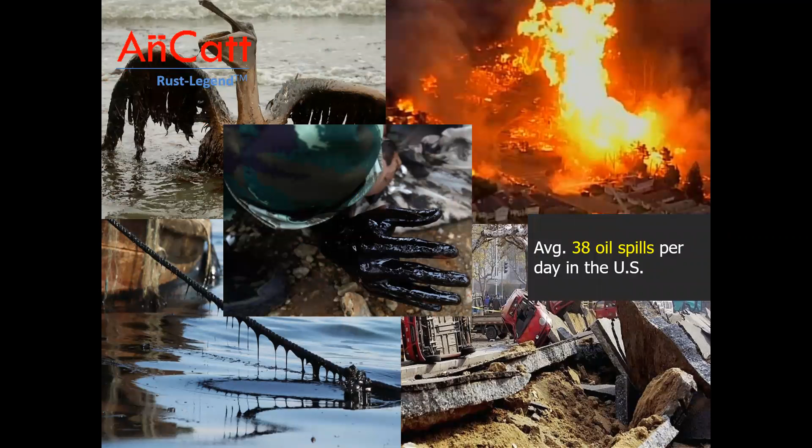Metal corrosion has been regarded as an unstoppable natural force, like aging and death. Believe it or not, there are over 800 corrosion-caused water main breaks in the US every day, and it's also the leading cause of oil spills and gas line explosions.

I'm introducing AnCatt's Rust-Legend by Green Legend, the world's only heavy metal-free, toxicity-free, high-performance anti-corrosion paint. It's also the longest-lasting one, where we have defeated the number one toxic enemy of the military and aviation industry after over half a century of worldwide intense R&D efforts.

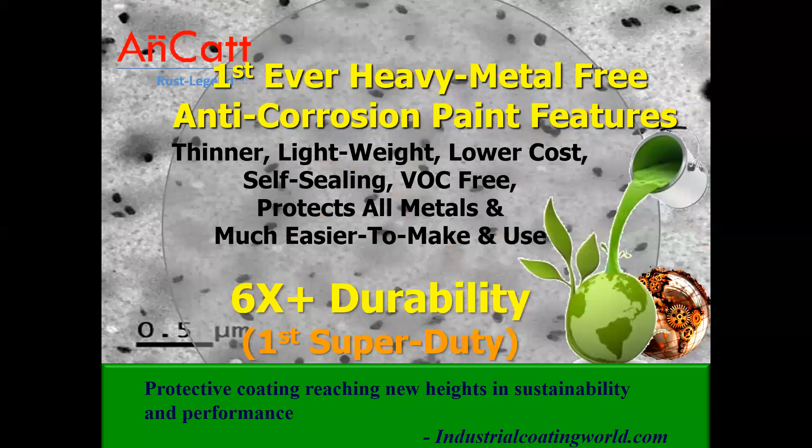Surprisingly, this revolutionary green paint product can be manufactured, used, and scaled the same as current paint products, without new equipment. It's also outstanding in all performance categories, such as much thinner, lighter, lower cost, self-sealing, VOC-free, protects all metals, and much easier to use. That will cut application time and cost by half.

But most impressive, we have broken the unbreakable corrosion durability barrier by a whopping 6 times, and we still don't know when the rust will come out yet. It's like telling a corrosion expert that humans can live to over 600 years old and still remain ageless. Sure, they won't believe you.

But after carefully examining independent corrosion test reports, they have to agree it is real and this is happening. The top 3 photos are AnCatt coating with a scribe line, compared to the bottom 3 photos, which is the back of the same panel protected by standard acrylic coating. As corrosion tests progress from 1,000 hours to 8,000 hours, AnCatt coating on top remained intact, while the back coating on the bottom became terribly corroded. After 8,000 hours, AnCatt coating still can provide perfect tape adhesion.

That's another miracle. Please notice the scribe line remains the same width without rust expansion, which demonstrates the amazing self-sealing feature. 5,000 hours is the maximum corrosion test hour; no current coating can reach 5,000 hours.

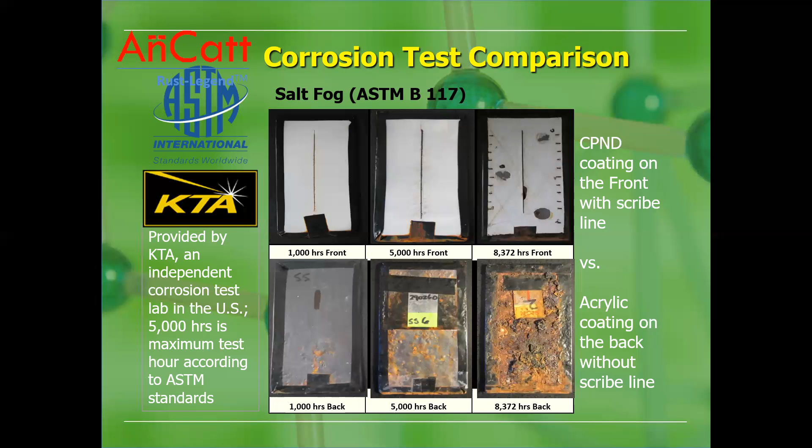The line covered with a continuous scratch by a sharp knife, nothing peeled off. That's how we receive the perfect score. Current best coating only can reach its status to around 2,000 hours. When we continued the test to a record-setting 13,740 hours, the coating remained the same, and we still don't know when the rust will come out yet.

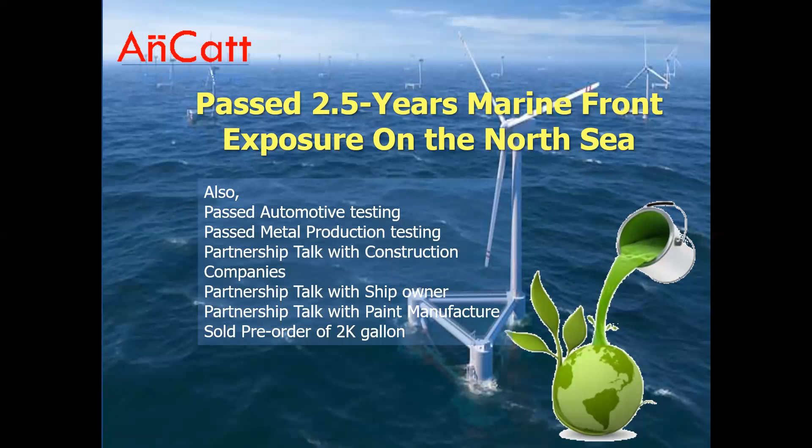Our technology is vetted and awarded by leading organizations. We have received a magazine cover offer by a leading painting coating industry magazine. We have passed a 2.5-year marine front outdoor exposure test on an offshore wind turbine. We have received the Solar Impulse Foundation efficient product label.

With highly toxic heavy metals such as chromium and lead facing restrictions by regulations, zinc is the only environmentally compliant anti-corrosion pigment, accounting for 85% of the current market, but it is less effective, requires more frequent repainting, and it's still a marine pollutant that kills fish and marine animals. It is prohibited to be applied in ports and certain open waters, and it cannot protect aluminum, which is a major aviation material.

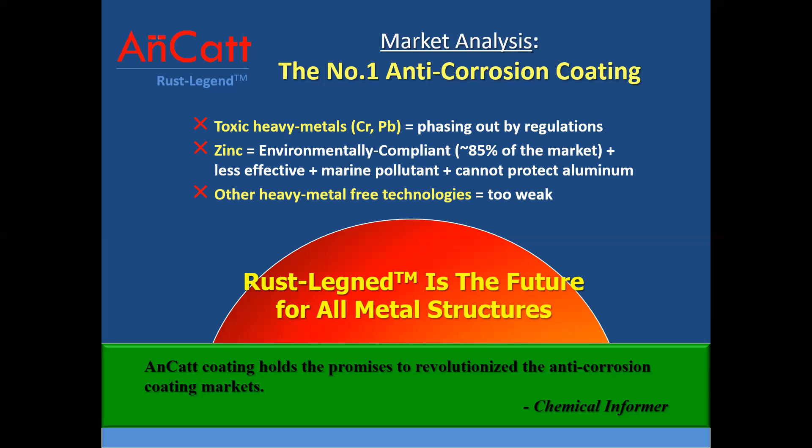Other heavy metal-free technologies are too weak in performance, not even reaching the minimum high-performance anti-corrosion coating requirement of 1,000 hours of independent corrosion tests. AnCatt Rust-Legend is a rather bright future for all metal structure protections.

We're trying to replace zinc-rich coating, chromium coating, and zinc galvanizing. We are targeting infrastructure, transportation, machinery, and pipelines.

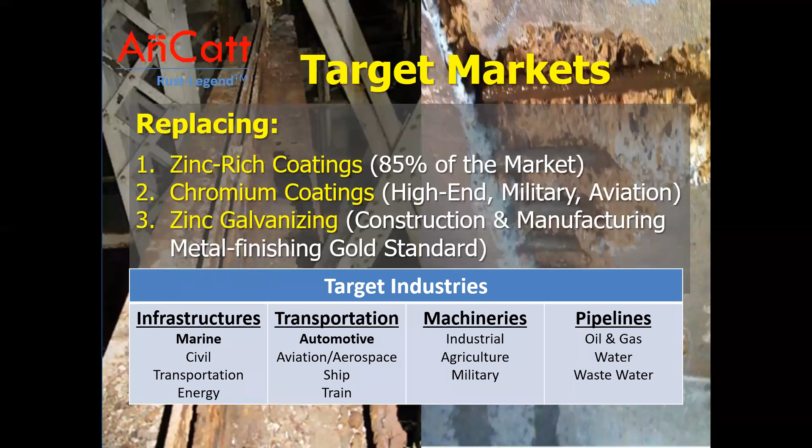The last Verrazano Narrows Bridge repainting project budget was $235.7 million. If the paint lasts 6 times longer, the savings will be $4.5 billion for the next 60 years if we count 3.2% inflation, not counting growth rate.

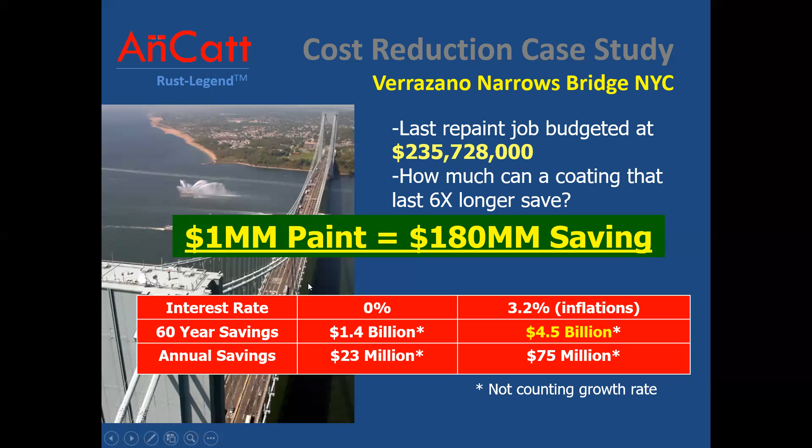Or we can save $75 million a year, $180 million in direct repainting cost. The indirect repainting cost, such as painting a bridge causing traffic congestion, is typically 10 times the cost of painting the bridge itself.

For the past 10 years, for offshore wind turbines installed in Europe, the repainting cost is 100 times the cost of a brand new wind turbine installed, or around $300 million repainting cost per offshore wind turbine. The offshore wind turbine has a designed service life of 25 years. Current paint can last up to 5 years in a typical marine environment. AnCatt paint lasts 6 times longer, or 30 years, and can save nearly $1 billion per offshore wind turbine.

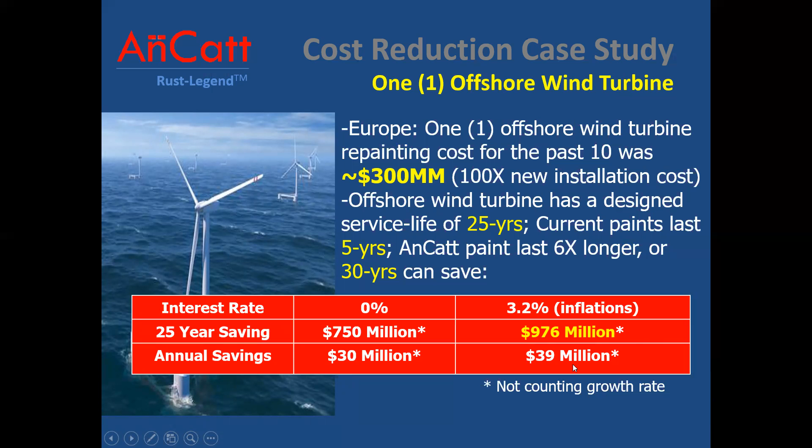If I count 3.2% inflation and not counting growth rate, that saves $39 million a year. We could mend the $15 trillion global infrastructure budget gap.

Sure, huge savings will lead to huge carbon reduction, but more important, the carbon reduction includes the two most intensive man-made sources of CO2 emissions altogether: steel production and cement production. If we reduce the amount of steel wasted by corrosion alone, we can save enough CO2 emissions to stop global warming.

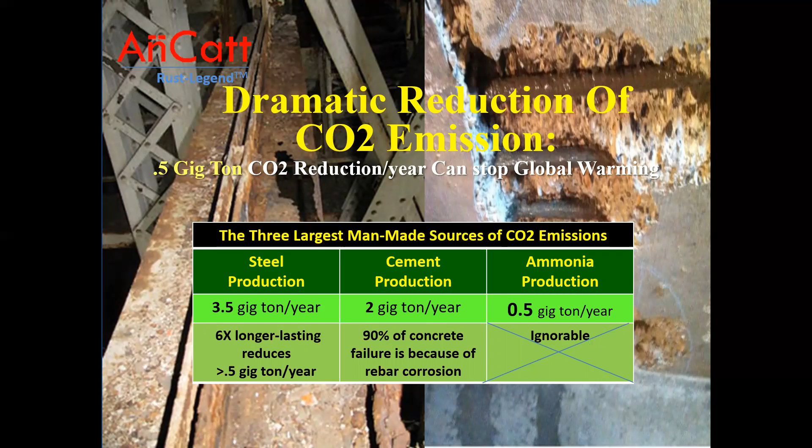With Rust-Legend by AnCatt, the best anti-corrosion paint ever made. Thank you.